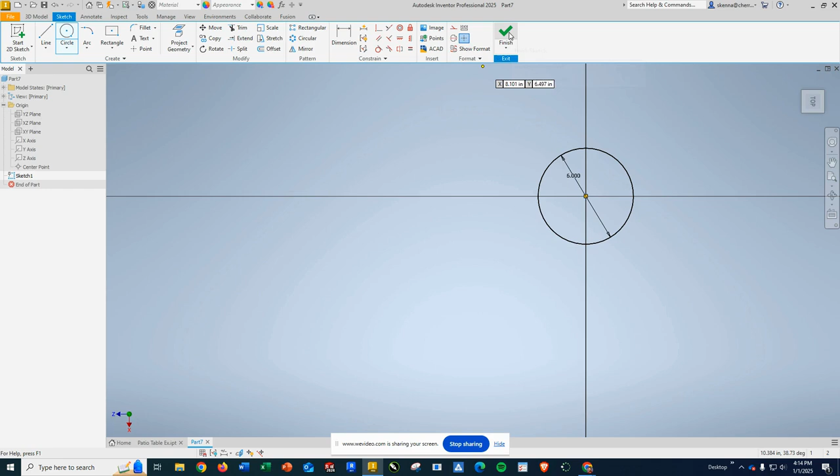I'm going to go ahead and grab my circle tool, and in the center, because I am going to line everything up in the center, I am going to draw a 6-inch circle. The nice thing is these sketches are all pretty simple. I'm going to go ahead and finish that. It's going to take me back to that isometric view, which is great. So again, I'm using the XZ plane to start.

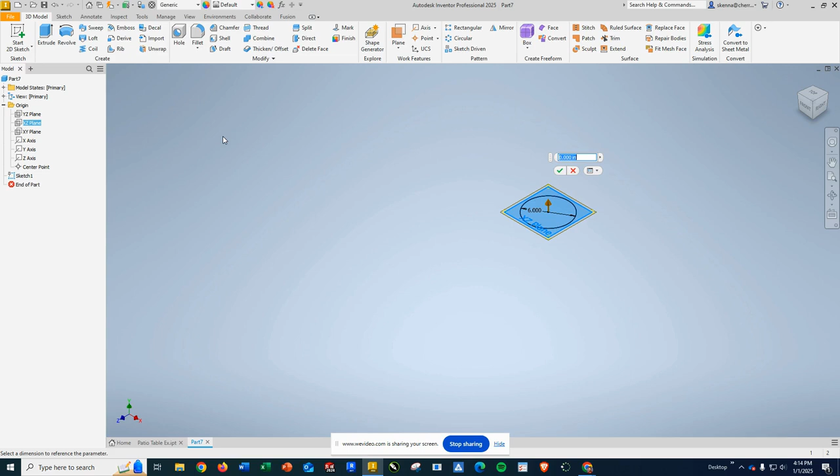The first thing I'm going to do is I'm going to create an offset from plane, start with my XZ plane, and I am going to go up 6 inches. The nice part is you can come back and adjust these. So when you're doing this on your own, you can mess with it, kind of estimate, put it there, bring it up or down if you need to. So now that that plane is created, I'm going to select that work plane and start a 2D sketch.

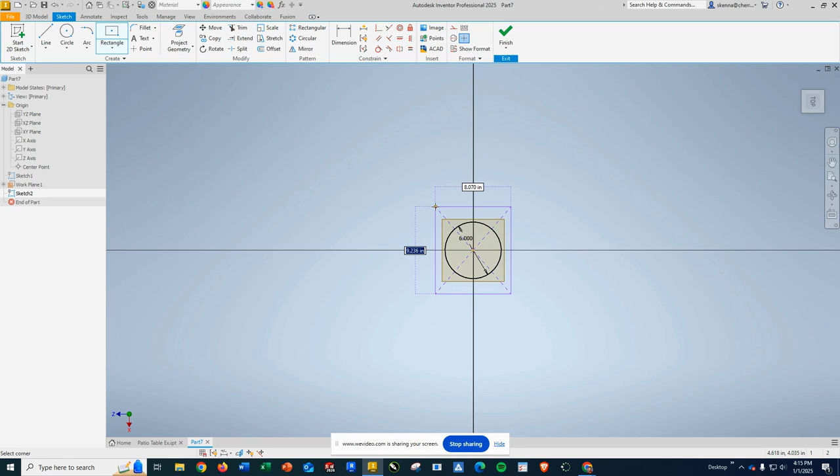This time I'm going to get a center point rectangle. I am going to start in the center, and I am going to make the starting square. It's actually a square, so same measurements, 10 by 10. So 10 tab 10, and we make that square.

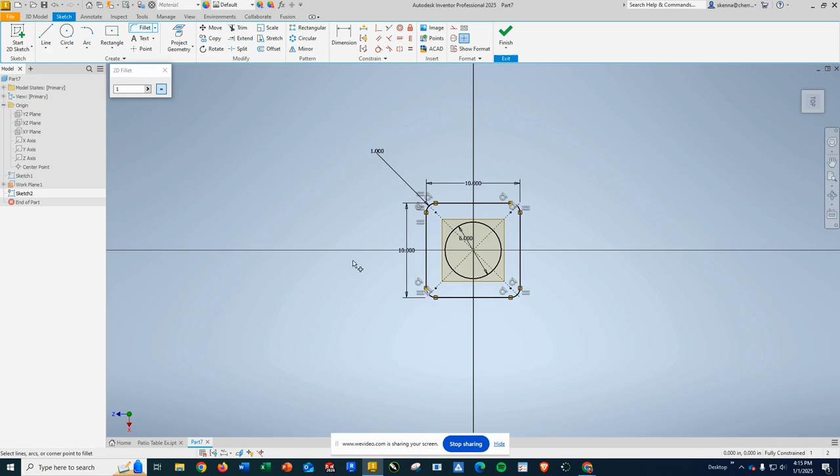The next thing I'm going to do is I'm going to grab my sketch fillet tool, set this at 1, and we're going to go ahead and start picking our lines to fillet all of the corners. So you'll be able to see what this looks like. So we create that sketch, again, 10 by 10, 1-inch corners. Everything's fully constrained. I'm going to go ahead and accept that. Go back to this view.

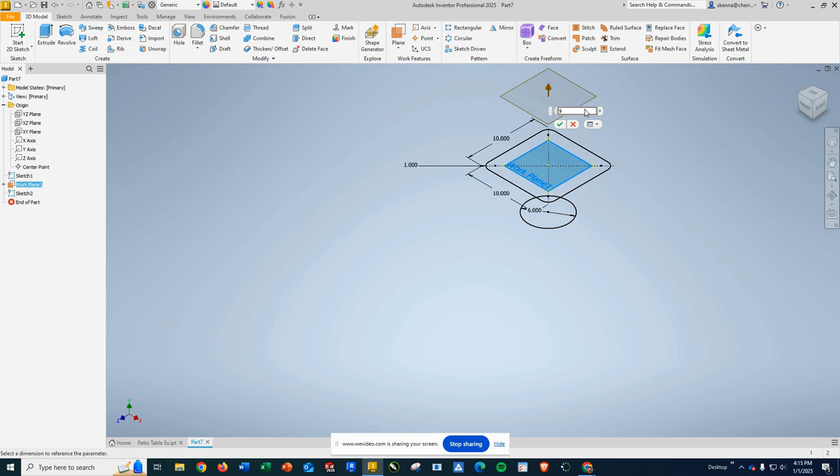We're again going to do an offset from plane, plane creation. So offset from plane. I'm going to click, this is the plane to measure from, and we're going to go up 9 inches. And then I'm going to go ahead and select that plane as a plane to start my 2D sketch on.

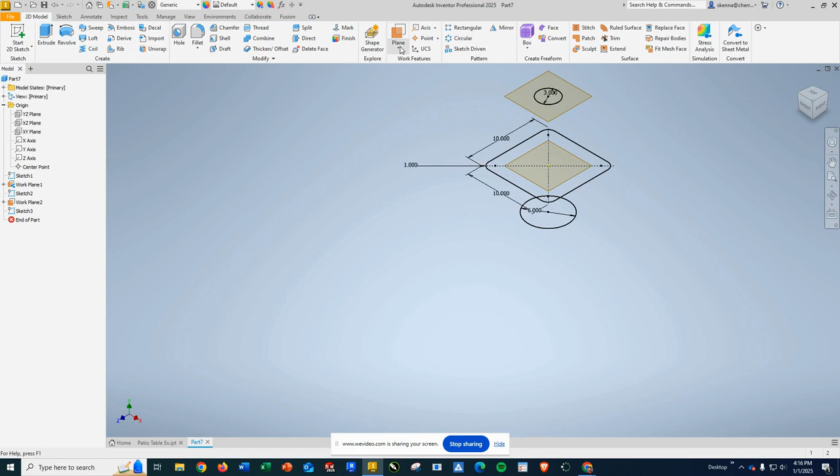This time I'm going to go back to my circles, and I'm going to make a 3-inch circle in the center. So to speed this up, 3 inches. Excellent. Going to hit finish. Going to go back to our stack one more time. Offset from plane creation.

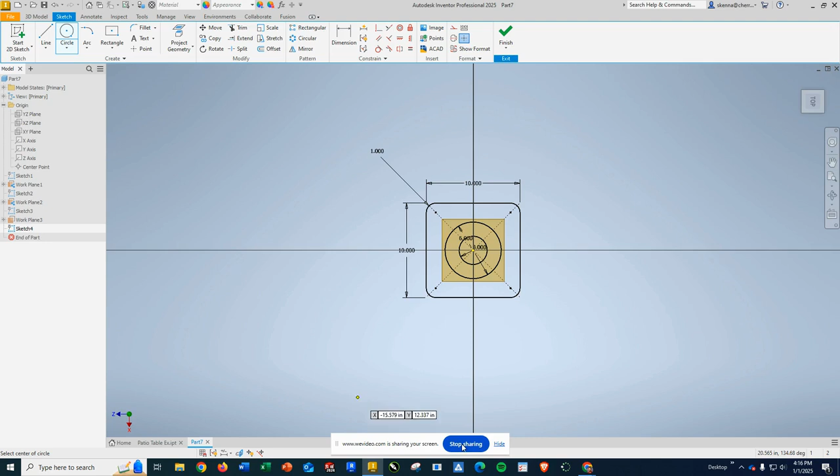From the top plane, we're going to go up. This time again, we're going to stick with 3 inches. On that plane, we're going to go ahead and start our 2D sketch. And my last circle is going to be a 5-inch circle at the top. So I am going to click my center point and give myself a 5-inch circle. There we go. Looks kind of cool from the top, but as we go back to that isometric view, now you can start to see the shape of the vase.

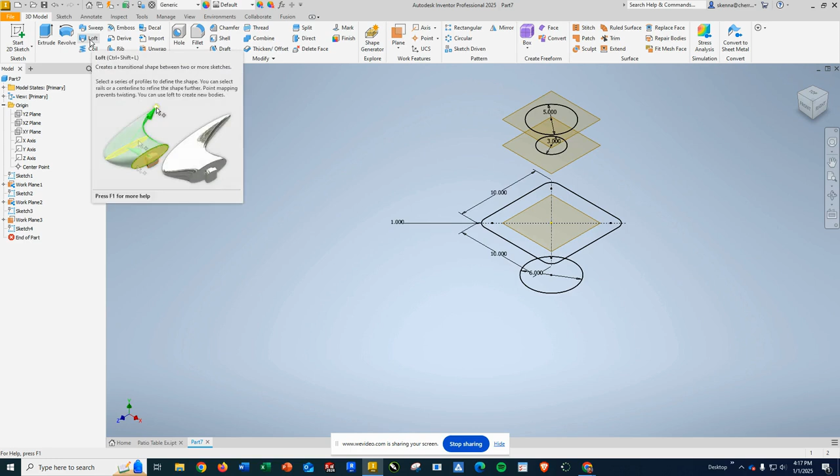So with all of my sketches created, I'm then going to go to the Loft tool. So I'm going to start my Loft, and here's my selections, and I'm just going to add them in order. So I'm going to go with the bottom sketch. Then I'm going to go to the next sketch up. I'm going to come up here to this circle and to the circle again. And you can see as it creates, it kind of creates this guide curve that it follows.

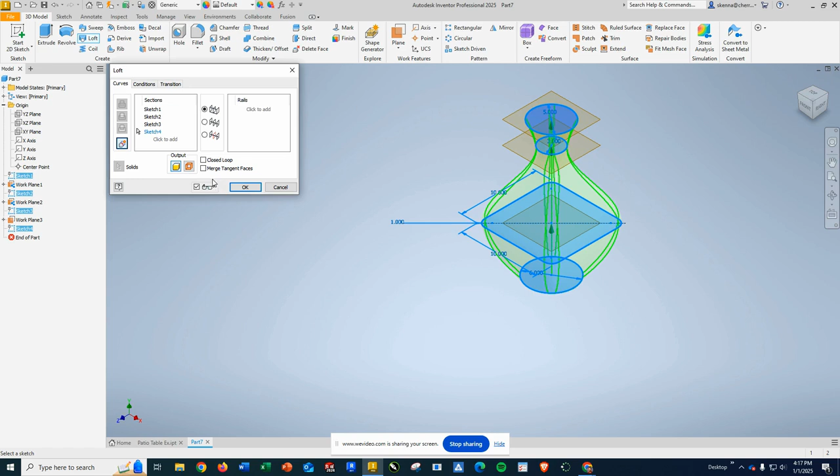If you wanted to get really advanced with a loft, you could have created a guide curve or what they call rails over here. So we've gone ahead and we've selected everything. We want to make a solid. There's some other options here you can mess with if you like. But for our purposes, that's going to create our overall shape, which looks fantastic.

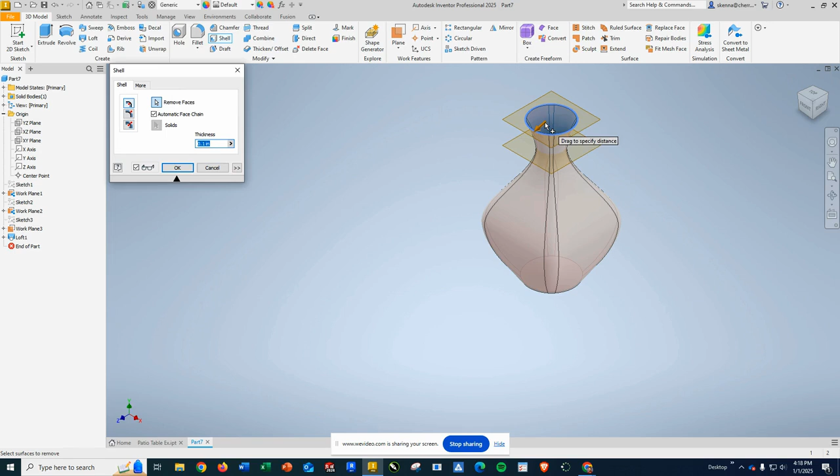The next thing we're going to do is we're going to use a tool that's called Shell. Shell allows us to basically hollow out a solid. So again, we've got to remove faces right here. The face we want to remove is this top face right here, so it opens it up. Now we do want to set our thickness at 0.25, and we hit enter, and we've now shelled everything.

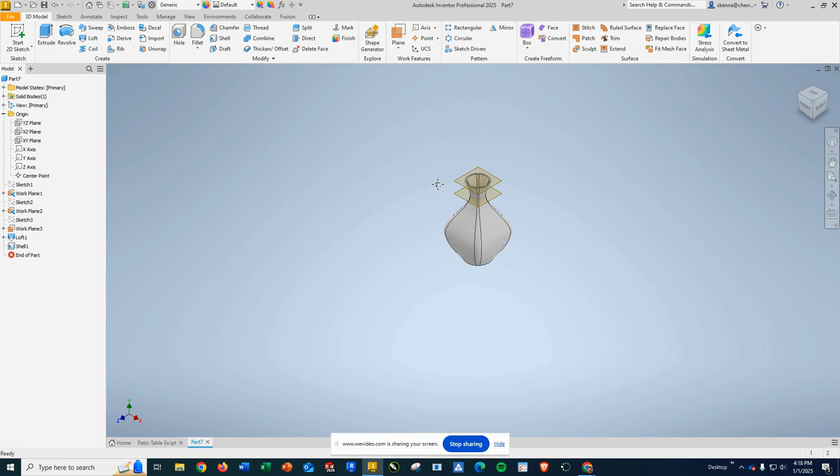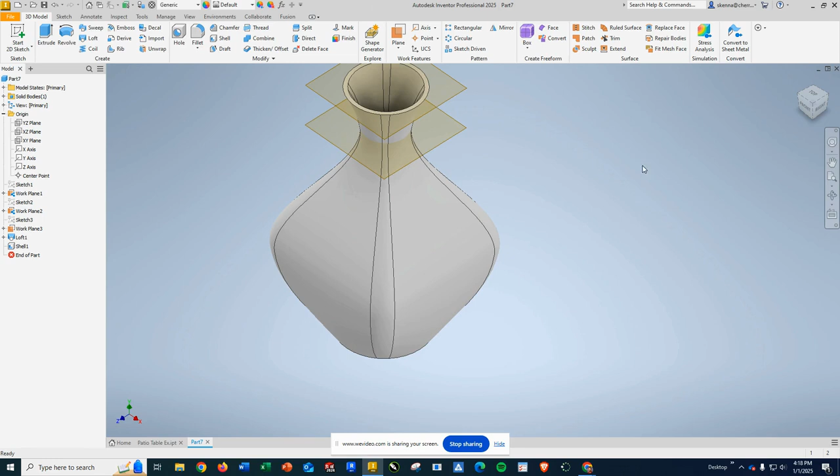So again, if you were able to kind of look inside this, I'm going to use my rotate tool, and sorry, wrong tool. I'm going to use my rotate tool, and as you can see, we've got the inside of this object all shelled out. It doesn't go all the way through. The bottom of it is still solid. It's still 1/4 of an inch thick there. It's literally the only faces that disappear are the ones you click on when you click remove faces. So I'm going to go ahead and go back to my isometric view here.

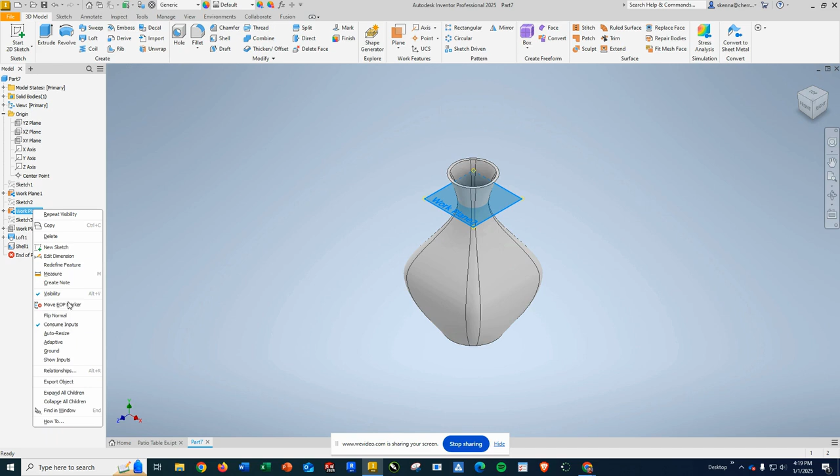Now, if you don't like the planes showing, you can, when you right click on them, go down to visibility and turn that off, so that if there are any planes you don't want to see or that aren't hidden, you can turn the visibility off so that you don't have to look at them.

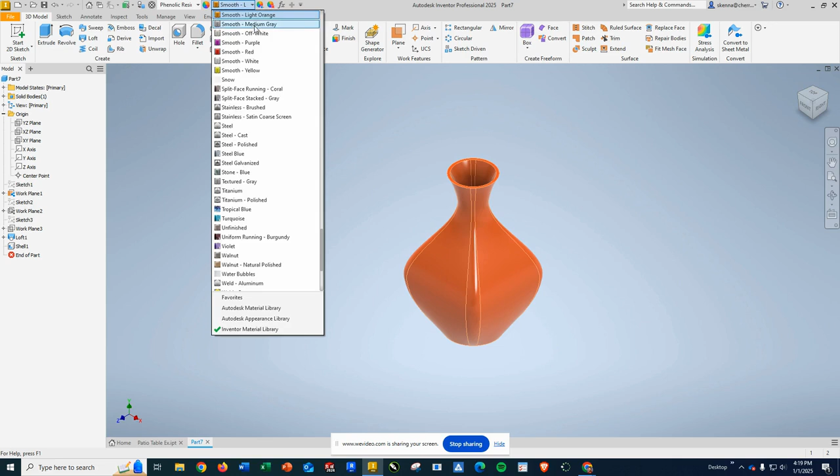Now, the next thing we're going to do is we're going to go ahead, and this is our completed vase. So at this point, I would definitely save it as vase. And I would go ahead and change this material to phenolic resin. And that does pick this smooth color here, smooth light orange, which is fine. If you would prefer a different smooth color, I can switch it to smooth red. And that gives us a great look.

This is the material that you need. This is everything that you need. So go ahead and right click on here, go to your iProperties, go to the project screen, take your image as you see it here, and then you can also switch to physical to get your mass for the sheet that you turn in.